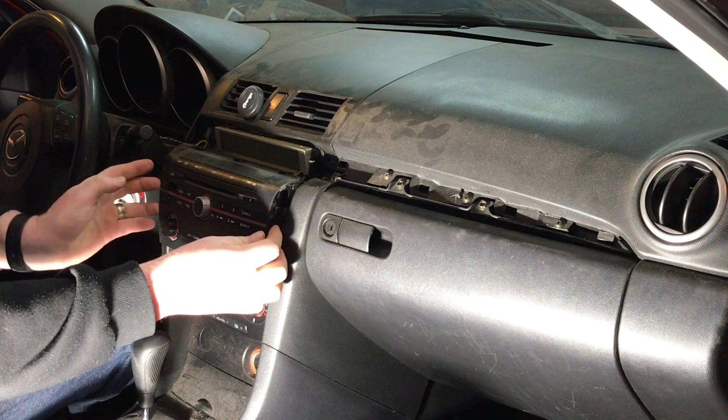Okay, so with those four screws out, just give it a little tug. It comes on out as one piece. Lift it down. There's a little tab on the harness in the back. Go ahead and disconnect that, like so, and your antenna plug. This comes free. At this time, we're going to go ahead, head over to the bench, prep the new radio and the wiring harness to plug into this plug, and we'll come back and install it.

Alright, so some of the parts that we're going to need for our Mazda. We have four main parts for the base model of the Mazda. We, of course, have our radio. We're going with the Pioneer, the DEH-S410BT. Bluetooth, aux, USB, AM, FM, CD, radio.

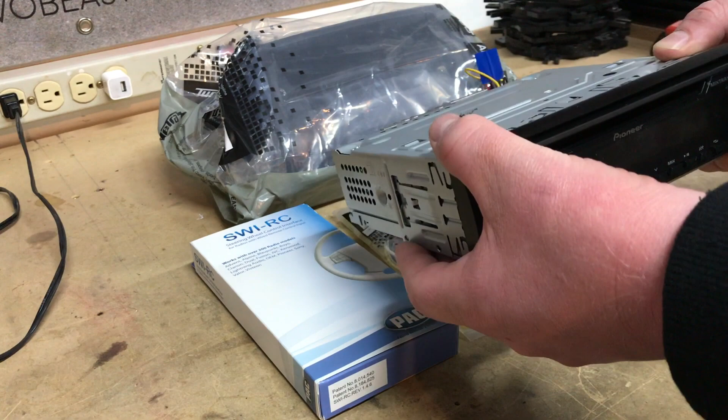You're going to need for your Mazda a wiring harness. We're using the Metra 70-7903 wiring harness kit. The dash kit that we're using for single DINs only, it's the Metra 99-7504. And then finally, our steering wheel control kit. To maintain those steering wheel volume control buttons, we're going to use the SWI-RC PAC module.

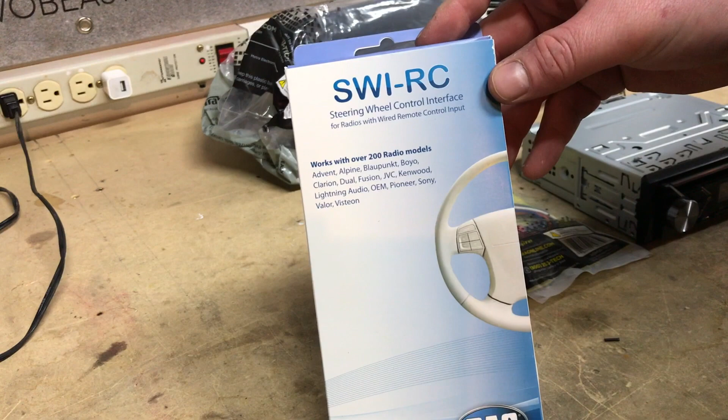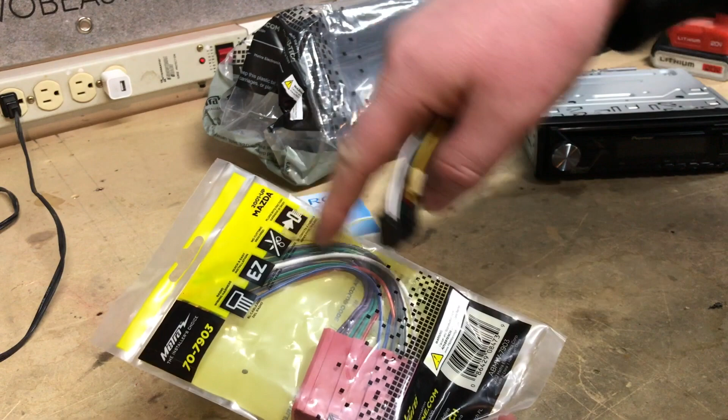This allows us to adapt the factory system into an aftermarket setting. So what we're going to do here at the bench is we are going to marry up the colors from our aftermarket wiring harness to the wiring harness adapter for our car, matching mostly color for color. We're going to solder everything up, make sure everything is nice and clean. In addition to wiring, we're going to also tap into the necessary wires in the car.

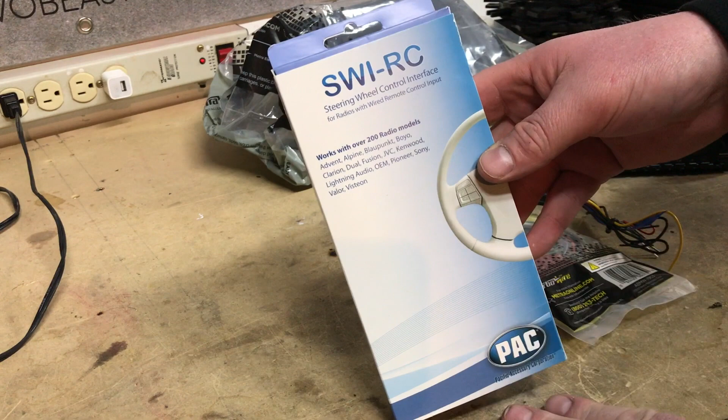This is going to give us the instructions needed of what wires we need to tap into to make our steering wheel controls work with our new radio. So let's get started. So we got our Mazda 3 series. Now, of course, we're doing the 2004 through 2009 here.

The wire that we need is the white wire, and it's going to connect into pin number 10, which is white and black on the car. We're going to tune our module to version 3, and then it says see notes number 39. Now what that means: connect the interface's white wire to pin number 10, which is white-black, of the vehicle connector. So that's the wire that we're going to connect this into.

And then connect pin 9, which is the brown and yellow in the car, to the chassis ground. So we're going to show you how to do that and get that all wired up. So we're going to keep this out and available for us.

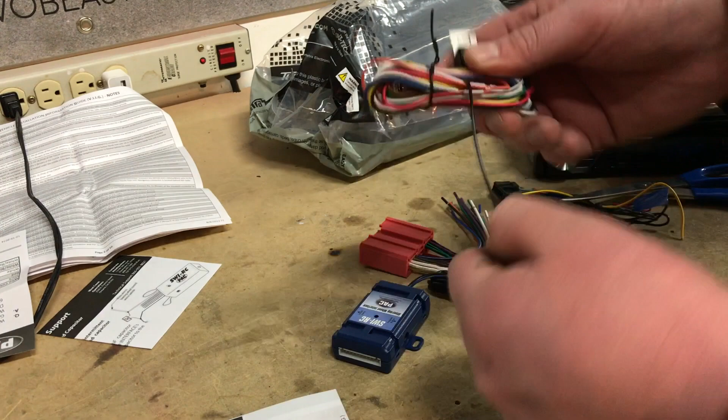There's three whites: white-black, and then solid white. We're only going to need solid white, not the other whites. So essentially here we got white, red, and ground. These are the main connections we're going to need. Let's get started with the wiring.

Alright, so what we've done here is just, as you can see from the video, we soldered everything up. Nice solid connections here. We also put some heat shrink on, which we'll pull up to cover our connections. Then we'll just use a heat gun to shrink the tubes.

The only one we didn't use is orange illumination. Our radio wasn't compatible. The solid blue wire generally is a power antenna or an antenna circuit. We just tied that into the red wire just because the Pioneer doesn't have a solid blue wire. It doesn't support one, so we tied it into accessory.

And then the only other thing that we did is we added the power and ground to our steering wheel control module into the red and the black, as you can see there. So at this point we're done, except for that one last wire that we got to solder up. We're going to put the heat shrink on and wrap everything with Tesa tape.

Alright, tubes are shrunk. We're going to use some Tesa tape and go ahead and wrap the harness. Alright, our wire harness is all ready to go.

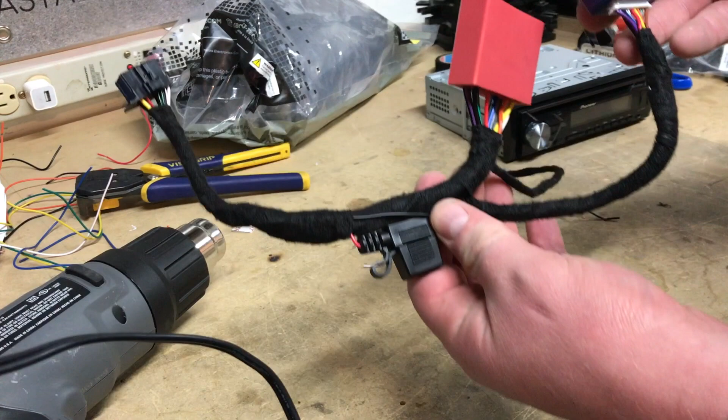Now remember, we have to set our dial to 3 as indicated within the instructions. After that, we're going to go ahead and get our radio mounted in our dash kit.

Okay, so we prepped the dash kit. Pretty simple. If you need the can to actually mount the radio within the kit itself - the metal can that generally comes with the new radio. If you don't have the can, you do have the ISO side brackets as well that basically you can use. You screw onto the actual radio, and it clips in the kit as well.

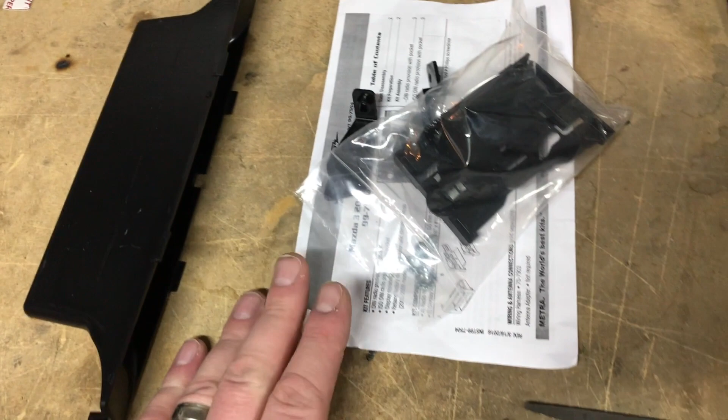So multiple ways. Our wiring harness is all prepped, good to go. We have our Bluetooth mic, so we'll get that mounted in the car. Now we have our pocket. The instructions here with the dash kit also go over different scenarios, whether you have the automatic climate controls or not. You'll use this pocket or not, depending on the trim level of your car. So read the instructions. So we are all done here. Let's head over to the car and get everything installed.

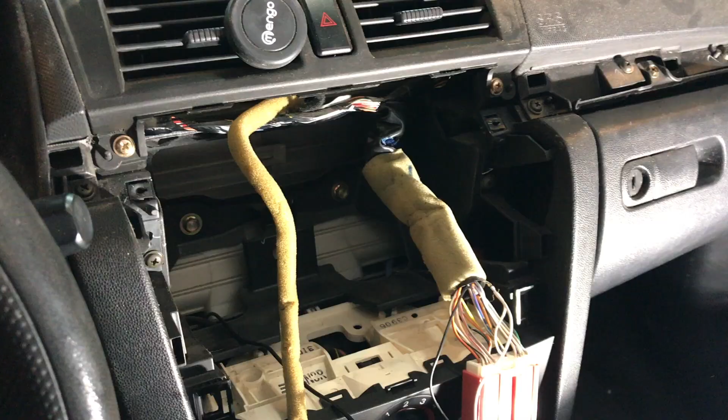Alright, so we're back here in the car. We've got everything all assembled with the kit. We plugged in our harness. Now, before we really do anything, we got to hook up our wiring for the steering wheel control.

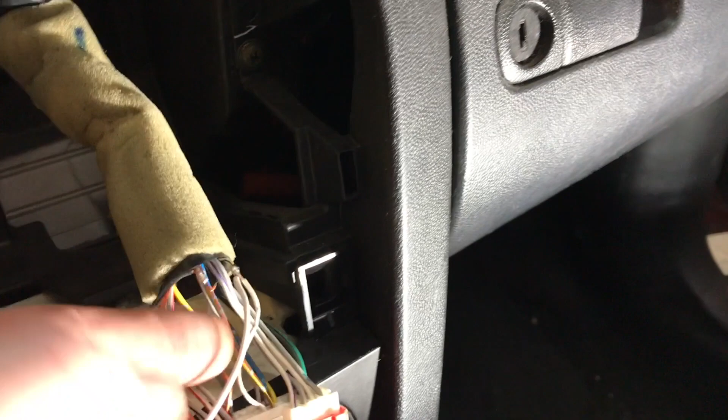So we pulled back the shield here, just enough so we can expose the wires, and you need 2 of them. Now remember, on the bench we have the white wire and the black wire that we kept out from the steering wheel control harness module down below. Remember, this white wire has to connect in. This is actually pulling the feed from the steering wheel controls and feeding that into our module, and then this black one is of course the ground.

Now on our actual wiring harness adapter here, you have white with a little black stripe, and then you have brown with a yellow stripe. We need those - it's pin 9 and pin 10 on the factory harness. So the one that our white wire from our adapter hooks to is the factory white and black wire. What we did is strip just that back. We separated the wire, exposing the copper, and we soldered onto it.

Now for the ground side, because we just have to ground this one, the brown with the yellow stripe, hooked our black wire and again soldered onto that. We're going to go ahead and tape that up, make sure it's nice and clean, and we'll put some Tesa tape on that as well. And that's what we need to do for a connection.

For programming the module, you have to go through the steps that come with the pack. We use version 3, so the first thing that you need to do to program this is you hold the little button on the side here before you start the car. You hold that button, you start the car, and what that's going to do, it's going to set this module up and ask you for what car version you want.

Once you do that, you click 1, 2, 3, because these Mazdas are version 3. Once you do that, you wait just a few seconds, and it will blink 3 times, indicating the version you just entered. Then immediately turn off the key. When you turn off the key, that saves that version number in the module.

Next, go ahead and plug in your steering wheel control 3.5mm jack into the steering wheel control input. Usually on these Pioneers, it's labeled as WR.

Once that's plugged in, turn the key back on, and at this point we're going to go ahead and program. Immediately after turning on the key, hold down the button for just a few seconds until the LED stays solid.

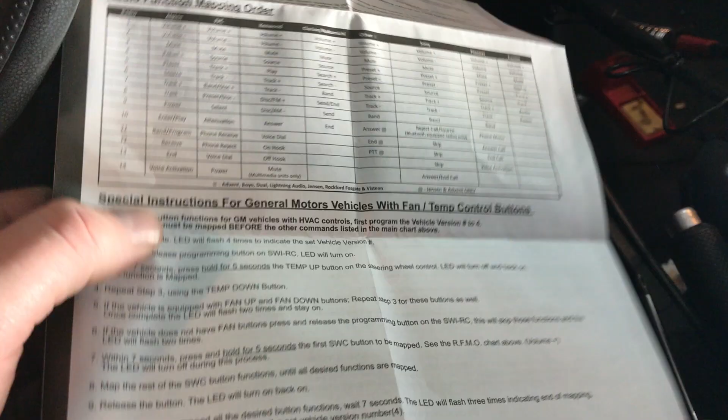Since we're doing a Pioneer, when we press and hold the button on the side of our module and it stays solid, we go to our Pioneer. When it stays solid, it's ready to program, and we'll hit volume up, then volume down.

Since this has a mute, we'll hit mute. We won't use preset up or preset down, so we'll just tap the button once for preset up, tap it once for preset down to skip those, then hit source.

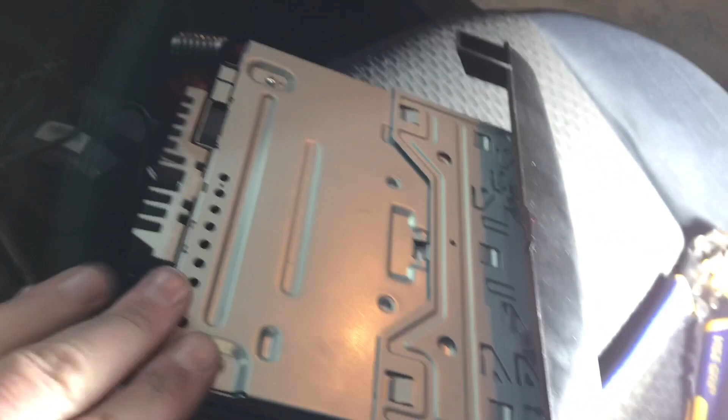Track up, track down. We'll skip band, phone menu, answer call, end call, and voice activation, just because this does not support 2 touch buttons, so we can't press and hold. Also, this is just a simple single DIN, which a lot of these won't apply to.

Once you go through all the steps here, don't touch anything, just wait, and it will blink 3 times, indicating the version number of the car. After that, you're going to test it.

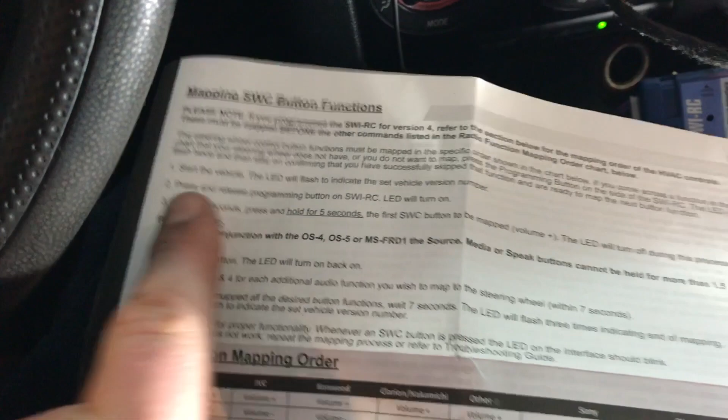If it doesn't work, follow the instructions and start again from step 1. It may take a couple of tries, it's not perfect. We went ahead and did ours, took a few tries, and everything is working on the radio.

Volume up, volume down, track up, track down, source, and mute, all good to go. PAC also has a great website to walk you through the process.

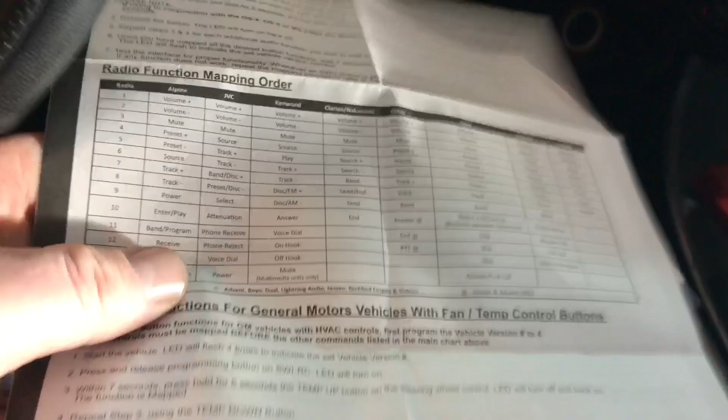Since we've finished our wiring, we'll tape everything up here so it's nice and safe. We put our Bluetooth mic up here on the A-pillar, tucked the wire down the seal underneath here, and fished it through one of the holes in the dash, bringing the other end connection here, which will plug into the mic input on the back of the radio.

We'll make sure we also plug in our antenna connector. At that point, we're just about good to go. We'll get the radio in, and show you how the pocket up above that replaces the screen also fits in.

Go ahead and plug in our Bluetooth mic, and plug in our antenna plug. Good to go. We're going to just tuck this guy back on in here.

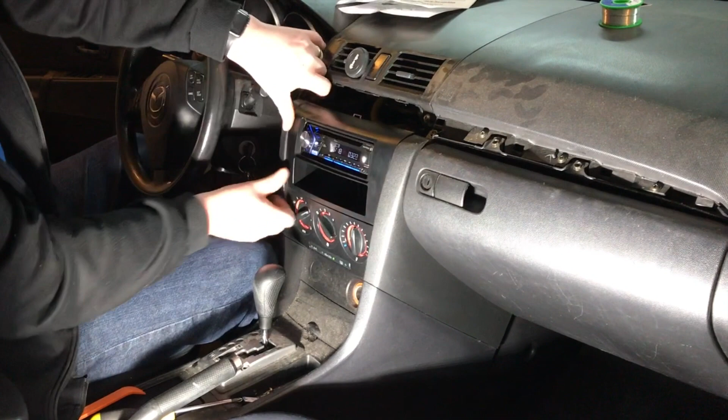Okay, so the bottom should clip in. We're going to use the same 2 screws that we used to pull the radio out. Just like so, make sure it's all clipped in and secured.

Now for this pocket, whether your kit comes with this little pocket or not, what we did with this pocket with the Metra kit is pop the factory pocket out. It's just a little window which displays the factory screen, which we'll no longer use. It becomes obsolete with this install.

So instead, undo these 2 screws, and the pocket supplied with the Metra kit will just clip in and screw together, providing you a little space to store stuff there. Then be sure to put in the 2 screws where the original screen was, to ensure nothing moves or gets out of place.

Okay, now at this time let's just do a quick final test here. Volume up, volume down, track up, track down. Mode is your source button, which works. Then we got mute, which works as well.